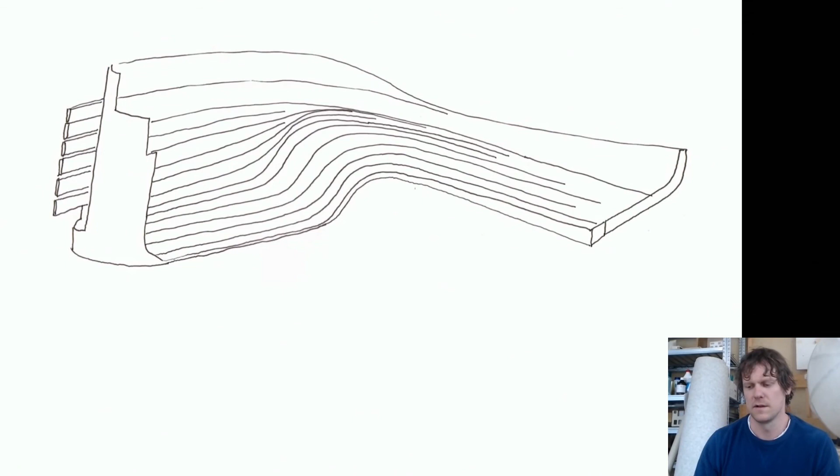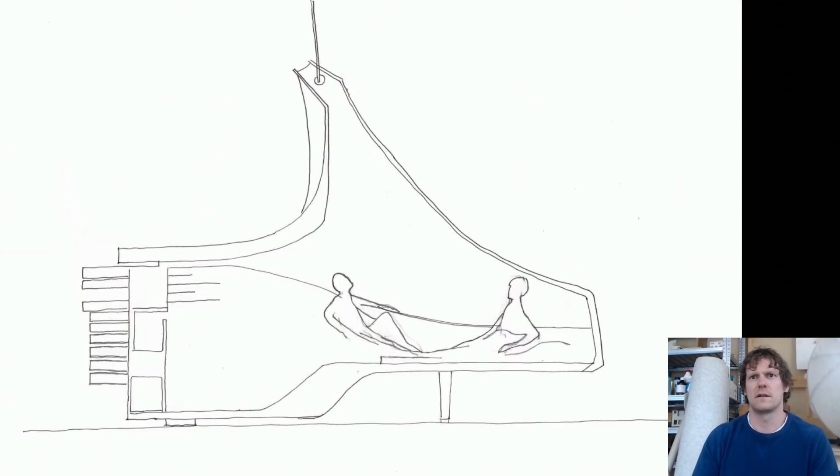On top, in this case, we use this felted Nuno wool. It's a silk, very thin silk material, and then we use wool on each side, and they are softly blended together. In this case, they create this veil on top of the bed.

And this was something, again, this visualization - this was identified very early by these destination developers, that to have this kind of honeymoon suite would have great appeal in an international travel market. So this is still visualizations, and this is the end of this pilot project. Then a local hotel came and bought the idea.

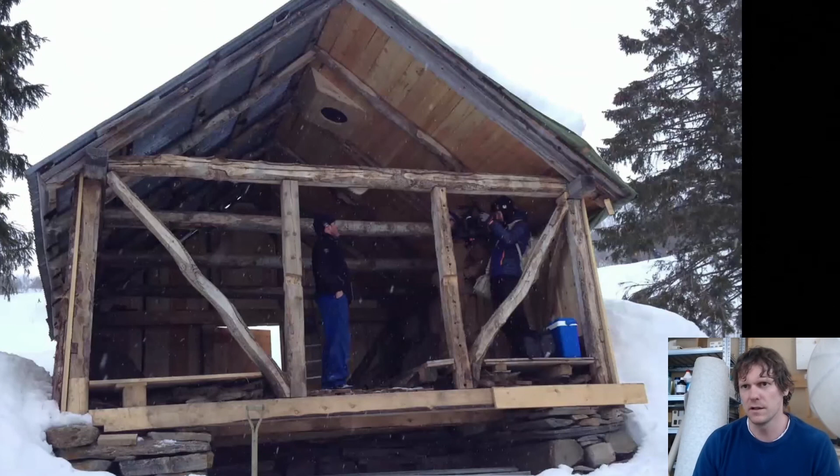You can see in this image that the project, the way it was developed, was very sculpturesque. It demanded a lot of space around it to become this centerpiece in a room. The barn that we eventually got was far from the same size - you could almost not stand upright. So obviously we needed to rethink the strategy, but we sought to combine aspects of these different typologies that we had developed in the initial phase.

Like most of these places, the entire building is very crooked - nothing is plumb or leveled. So because we wanted to expand and use as much space as possible, we needed to measure everything and translate all of these measurements to our workshop, where we started to make this shell - these are the roof rafters, and these are the beams on top of the walls. Every imperfection, everything that's slanting, we measured and put into this workshop, and then we started to make everything as modules.

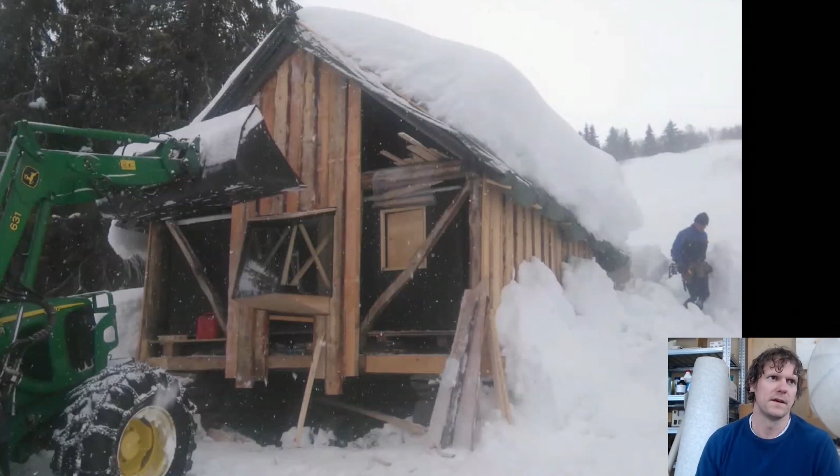We made it as a ready piece, flat packed, and brought it by tractor. This also shows the intention of the project - to give these people a reason to keep their buildings intact.

This is the actual owner on the right side - he owns this barn. He sold his land, part of his farm, to a ski resort, so he has more money than he can ever spend, and he has a lot of these barns, but no reason to keep them. But the moment the hotel wanted to rent his barn and put this module into it, he started to change the cladding and change the roof, because then there's some use of it.

As I said, the new project needed to fill this void in a much more precise way. Even the small gutter in the center, we utilized in order to gain height in this module. Usually on each side of this there was a cow, and then they would shit into this gutter in the middle - that's why it's deeper, so you could just shove it out.

We made this to fit into that, and then we had this entrance like a moon door. In the ceiling, you can see there's this light tunnel - a very reflective pipe that goes through the ceiling with a prism on top and brings light into this very small pod. Here we can see how we also incorporated part of the anthill aspect - just slightly going through, very carefully relating to the situation, to bring in this very particular view that we have.

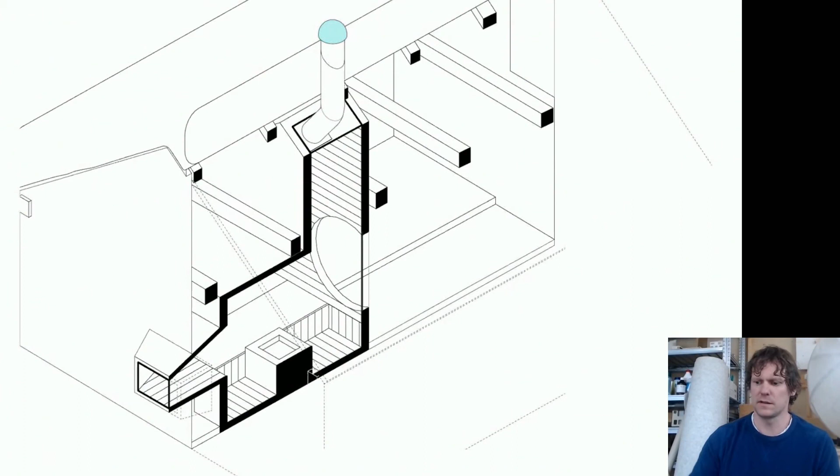And we can see how the module relates. To us it was extremely important to keep a big part of the existing space as an actual space, so that it would be this experience of going into the original. Here we can also see these slate stones - this is where the hay used to lay, so the cows would face this hay and graze.

And here we can see these slight nuances - it's much lighter and more refined, the one that we add, but it's the same material and comes from the same forest as the existing one. It's just slightly less crude or coarse in the detailing and materiality.

And here is the threshold between what we added and what was already there. So this is like, it's not sitting, or you cannot stand in this space. That's also why we wanted to make this entrance, like this moon door, something other than a regular door.

So you would have to respond, going through the opening, you would have to respond with your body, kind of come down, and then you're asked by the architecture to take a seating position and be on your knees on these tatami mats.

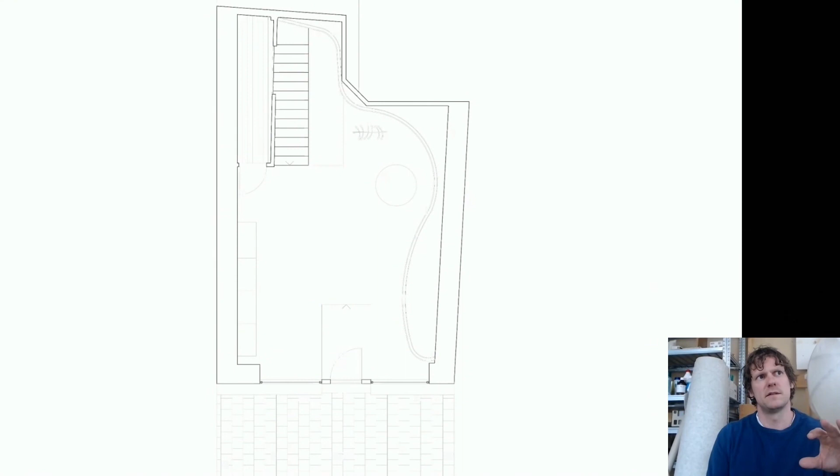So we wanted the top one to manifest this kind of social arena. I don't know if this is too light for some of your screens, but you go in and then you have this fluid wall, and it creates this mezzanine where you have the staircase taking you down to the basement, and then there is also this very slim space next to it.

You go there with your friends, try on something new, and then show yourself to whoever you are with, and get some feedback. We wanted to manifest that, and in addition, we wanted the basement to be like this flexible space, as this is also part of having a retail shop or retail space now - it has to be like a showroom.

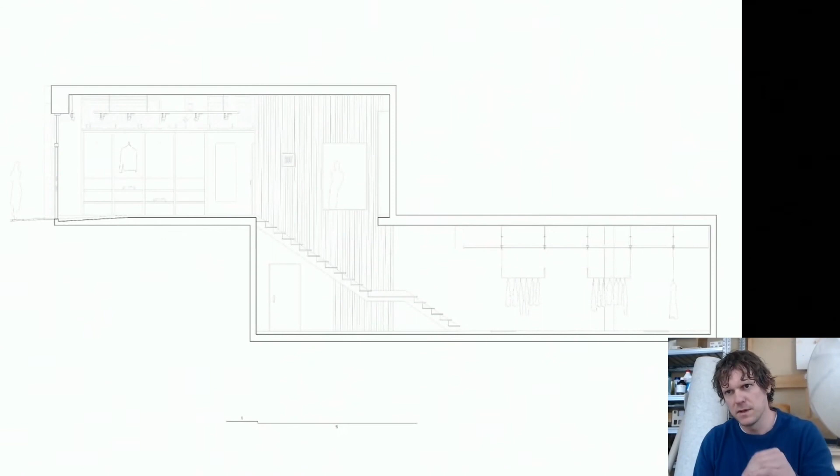It's where, in their case, they have this one shop in Oslo, and then they have one shop in the US that we also designed last year. But apart from that, most of the shopping is done online. So they have to bring everybody together, everybody that wants to experience their brand. And they wanted to be able to do these ceremonies, or fashion shows I suppose, like catwalks.

So we also designed the basement with this very flexible ceiling and very open space on the floor, where we made this pathway that's always part of the floor. And then we wanted to take away this cellar kind of feeling, this subfloor feeling. We introduced this very light ceiling - it consists of fabric, and behind that there's a lot of LED lights in strips, made so that the light cone overlaps.

So you would have this completely perfect lighting ceiling. And hanging down from those are hooks where you can hang this flexible hanging system. And also, as you may notice, the sprinklers are painted in the same color and go into the grid and the rhythm.

So it's kind of nice to work with these high budget retail spaces in order to experiment on the detailing and devote ourselves to this detail fetishism in a way, and then maybe bring it out into more real world application as well.

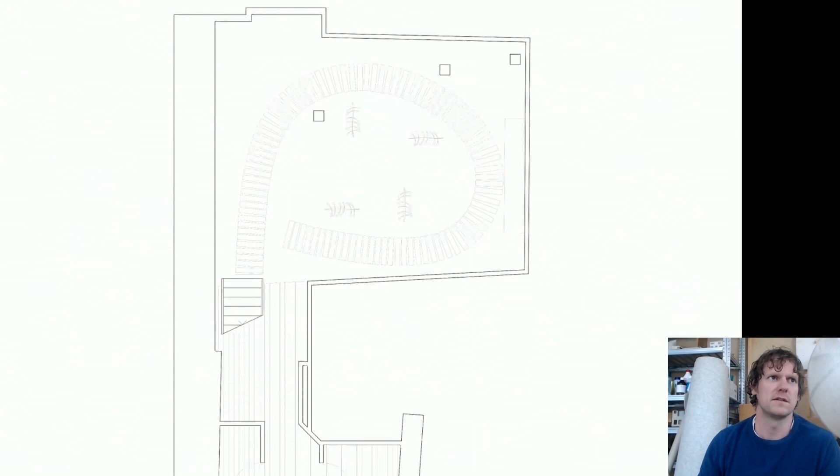You can see the plan with this catwalk that's embedded into the floor, this flexible hanging system, and there's a detail from the oak floor. It's kind of like this earth, rammed earth floor, where this is just rammed into it, flush.

A very important part of it is this kitchen cabinet that normally just sits in the back, but it can also completely transform this space into more of a lounge area, where you bring out some furniture, and then you have a more intimate atmosphere together with some clients.

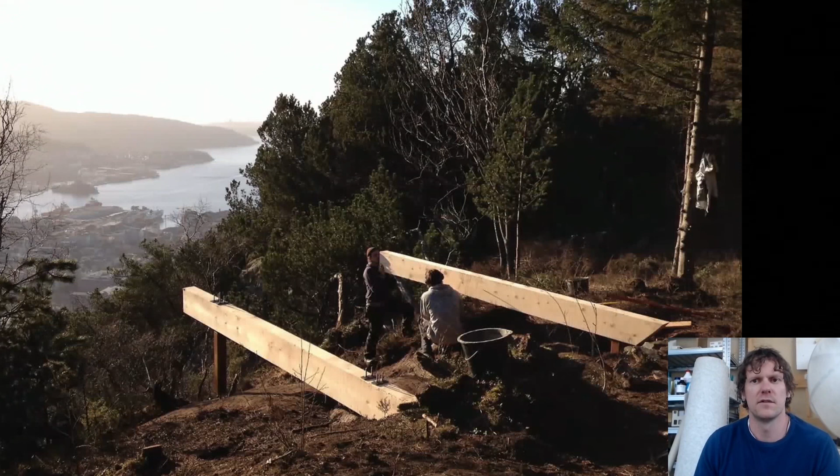So as I said, this is something that we do less of. What we do more of is these small projects in our own region. A lot of these are developed back and forth between the location.

This is something that we did, a project we did 5 years ago together with students. So we initiated the project. We asked the municipality if we could, if we raised money, if we could make a guest room for the city of Bergen.

We had some issues landing the deal, but in the end we said, okay, if people don't like it, then we will pay to remove it. So we got some funding from people that wanted to give this gift together with us.

And in the budget, we also put away some money so that the government or local municipality could just decide they don't want it anymore, and then we would have to take it away. So then we got accepted.

And then we started to go back and forth between the drawing board and the site, started to make some of the actual foundations before we finalized the design, and made a lot of experiments in the workshop.

And in the end, we landed on this because we wanted the client to be like the children, especially the children of Bergen. A lot of people don't have access to the outdoors, and it demands a lot of resources. So even if it's seemingly free, we wanted to create this space that would be accessible to everybody.

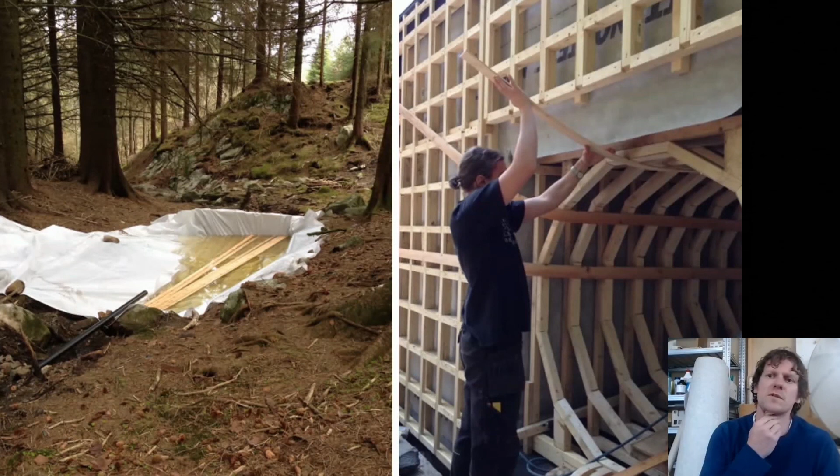This was done, we experimented on school, and then we brought it up and started to build, but the wood had different moisture, and we had different quality of wood when we came up, so everything started to crack. These are just some stories from the building and how we made it.

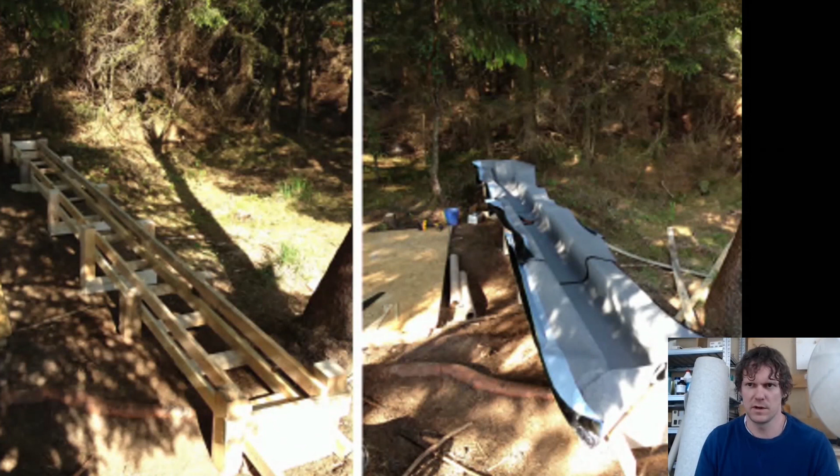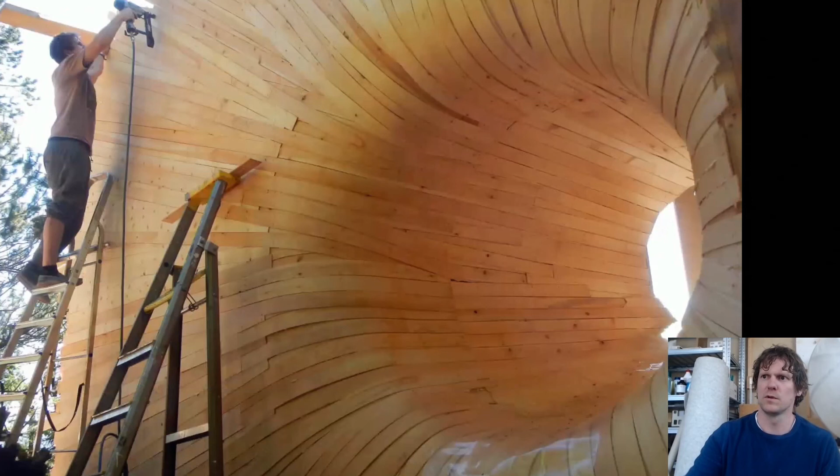So in the end, we had to make a hot tub for all of the boards, and we had this old heater that we dismantled, and then we took the heating elements and made it into something much more sturdy, where we could heat the water. So every piece of wood is first boiled, and while it was still like boiled spaghetti, we put it into these layers on top of this entrance.

And you can see the freshly mounted entrance into this cabin.

And as I said, one of the things we wanted to achieve was to have this appeal to the younger clientele. And we wanted also to be like an attraction, a place you would visit even if it's closed, because the way it functions is that you borrow the key from the municipality.

You have to go, it's completely free of charge, so it's been very popular. But we wanted still to be an attraction, even if you didn't have the key. So you can see how the children run around and play and enjoy this area. And also, in order to take nothing more than we give, we also lifted it up, and then we had this lunch place where you have shade from the rain.

This is an interior, very simple, with these curves where you have this mezzanine where you can sleep, and then you have a fireplace, and this is the city of Bergen. We have this funicular, like a train with a cable car that takes you up to about 400 meters above sea level. So this is extremely close to a highly dense urban area, and it has now been rented out for the last 5 years, and it's been fully booked ever since.

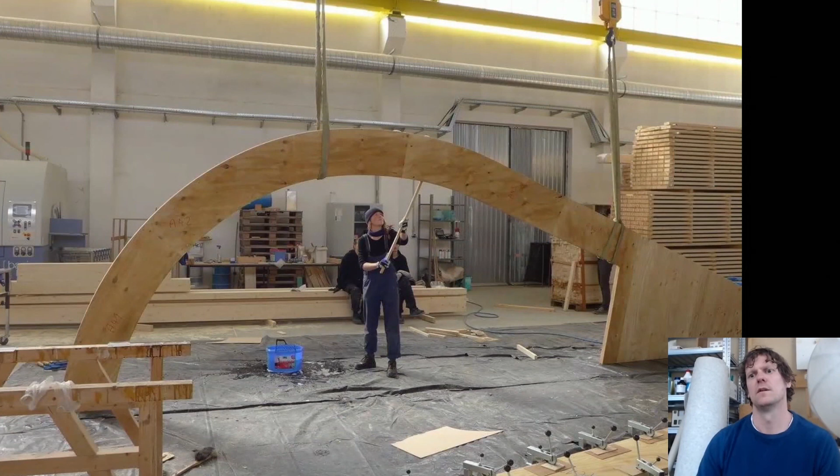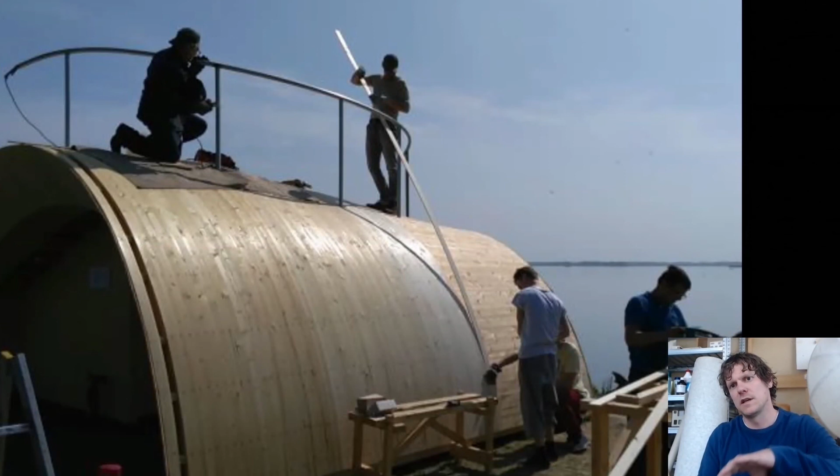And then we have these industrialized workshops where we could clamp everything and make these very precise shapes that made the building very easy. So you can also see the vision coming to life with this wooden carpet.

It's several layers of bent wood. In this case, the wood is actually just regular panels, thin panels of maybe 12 millimeters. So the bending is done without any treatment, because the curve is so big. We can have these very smooth shapes without doing anything special, and it's very natural to this format of the wood.

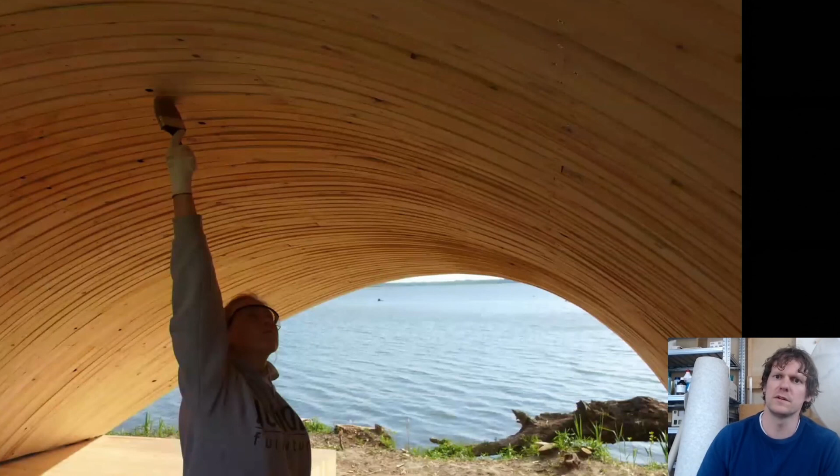The most important space in this project is this covered cave-like area, because the main client here was bird watchers. All they need is a dry surface and preferably protection from the rain, and also a silhouette in the background so the birds don't get scared. They want to be as low as possible, so they can lay here and look at the birds.

We also insisted on bringing this to some kind of furniture that would have appeal to everybody riding across on a bike, for instance. It's a very long official bike road that stretches along the Danube River. It was also popular with the main target group that made these bird watching seminars possible.

It's connected to a professional bird watching agency that takes people around and brings them up to show them this very nice area. And once again, the fashion industry wanted to use it. A local fashion blogger sent us an image afterwards, which was funny.

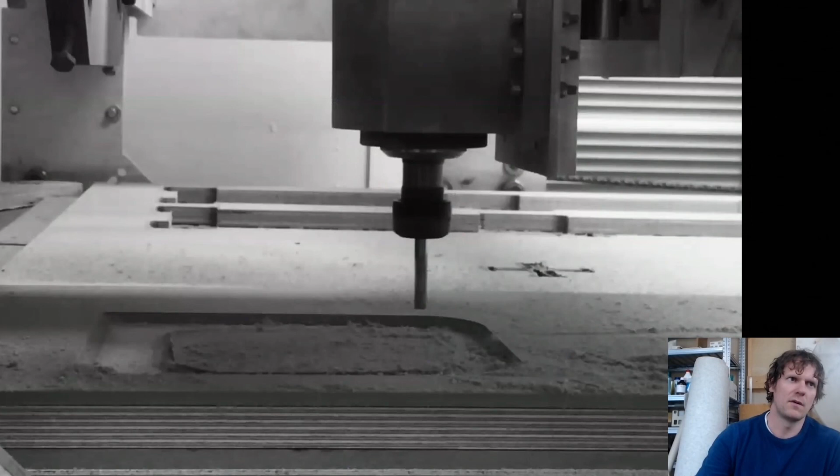In this case, we had to make our own CNC cutter, as we didn't have one already. We found that because the design is this very soft gesture, it climatizes this one space. And then inside that, we placed this sleeping box.

I think that architecture in every culture starts with this kind of gesture to climatize something. Either you protect yourself from the rain, or you want to completely control the climate as we do now, or it starts with the need for shade, or in our case, very often protecting against a certain wind. The less we do these fully climatized projects, the more we can appreciate these different transitions between the outdoors, the nature, and the fully climatized, like 22-degree spaces.

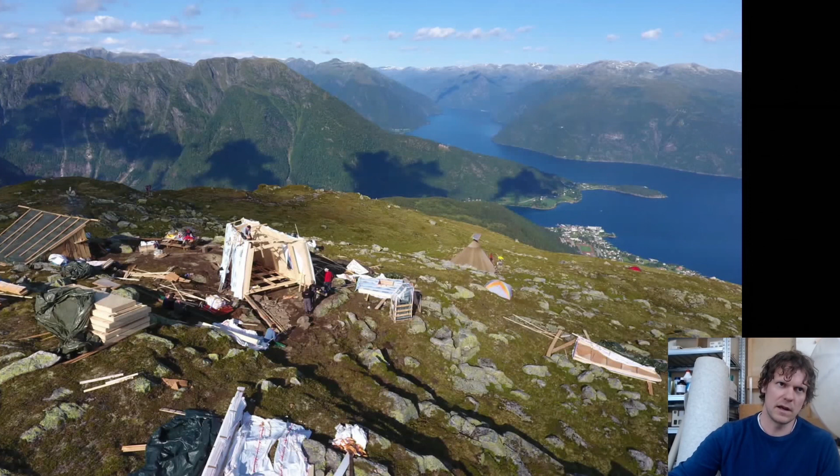This one - the closest road is also down here, so it's completely cut off infrastructurally from the rest of the world. We had to transport everything with a helicopter, so we did everything ready-made in the workshop. We made more or less the complete building, put insulation into everything, made it tight, and made it so that every piece is manageable for 2 persons.

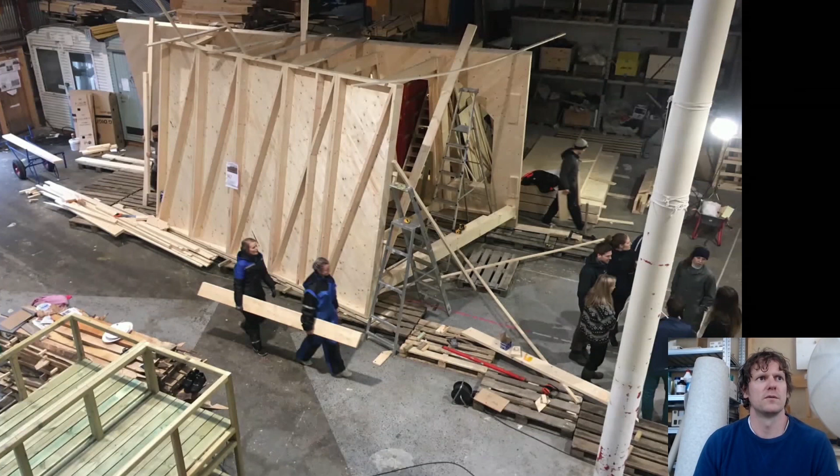You can see here that it's self-supporting - this is one piece, before the insulation is put in. The entire mounting process is planned, and things are flat packed in a reverse order, because at this altitude we wanted it to be as efficient as possible.

Once again, it's this notion of having the architecture be very immediate when it comes to the climatization aspect. The architecture is like a gesture to control the climate, a gesture to protect whoever is visiting from whatever rough climate is here.

In this case we have two very heavy winds, southwest and northeast, that appear at different times. So we always wanted a sheltered entrance area, and we made this shifted parallel plan. They're not parallel, they're kind of a V shape, shifted a little in relation to each other. So we get one sheltered entrance here with this view, and another sheltered area here with another view going out.

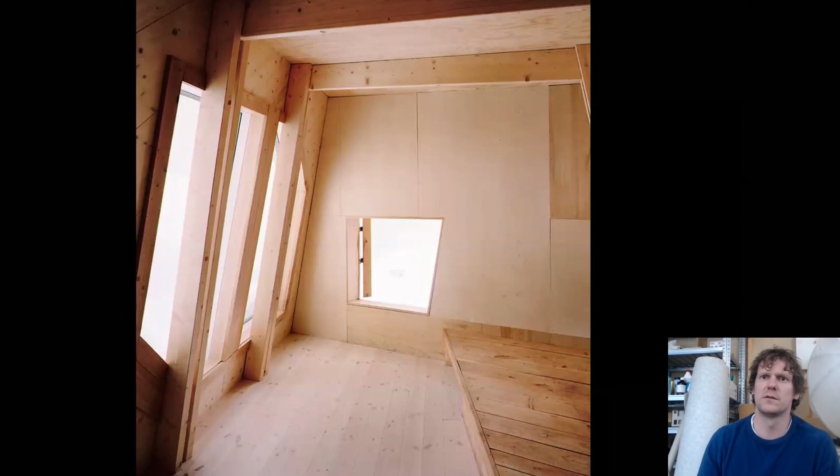We also wanted to work with this motif in the interior space, so you get this very sheltered feeling even though it's a fully climatized space. We wanted that atmosphere of being inside a ship's hull, where you feel the environment and feel, in a way, what's at stake.

And this is from the entrance, where you can see down to the fjords. It's a very hazy day. We have two different entrances: one on this side with a kind of counter, where you sit in the opening, and the other is more of a conventional door that you just go through.

Now I'll show the last one, which is more conventional—something from the historic center of Bergen. In this historic center we rarely see new things, and when we do, it's not necessarily very successful, I suppose.

This is an extremely big yacht designed by Philippe Starck for Melnichenko. This private structure goes in and completely destroys the area—this is the UNESCO harbor front in Bergen. It shows how fragile these situations are: if you bring even a boat with such contrasting aspects, it completely destroys and takes away a lot of the quality we feel.

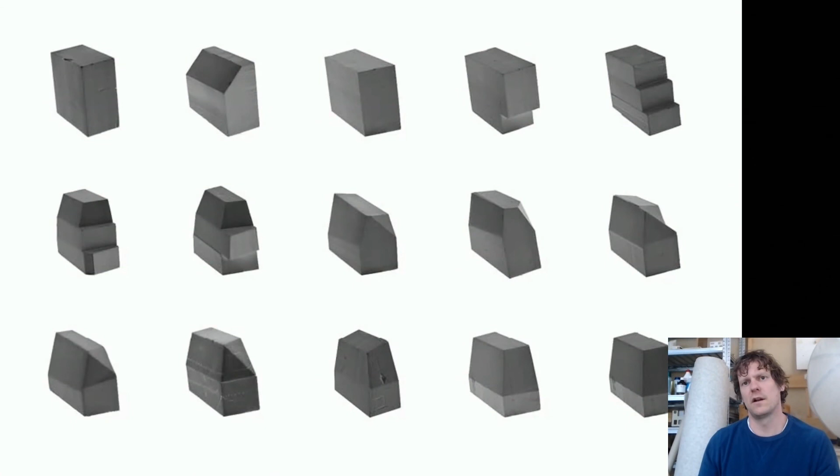Working with this situation, we needed to find an architectural language that would both deal with this notion of public space and also relate to the surrounding area. This is more of a conventional architectural model-making dialogue, where the conversation you have around these attempts is kind of the DNA of an office, and what you use to score them. In our case, we used them to find out how we could create good quality of space for the project, but also how we could have a shape that would relate in materiality and scale, particularly to the neighboring buildings.

One of the first things we did was break it down so that our surfaces would all relate to the surfaces around them, so none of them would be individually bigger than any other facade or shifted piece of building that we see around us.

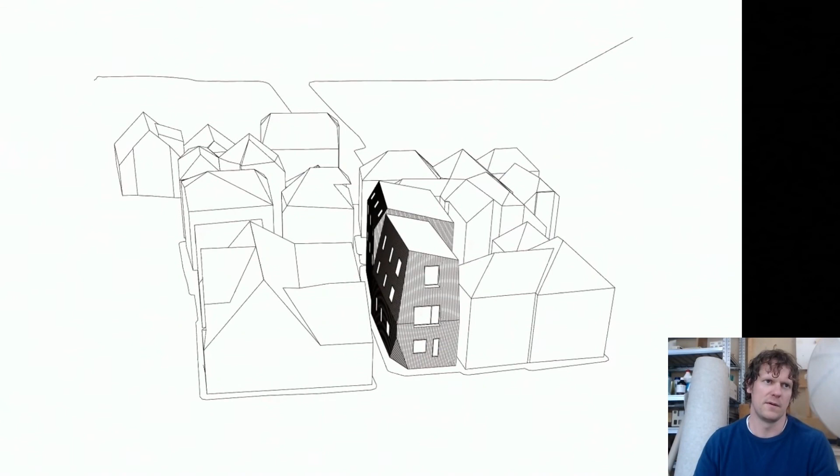We also separated the two volumes into two. They are connected through this piece in the middle, but are also very much visually two different buildings. This relates to the facade on the backside, where the existing one also has these two broken buildings. We took it a little bit out from the existing buildings to not destroy the detailing around the rafter, which is extremely important in these historic buildings.

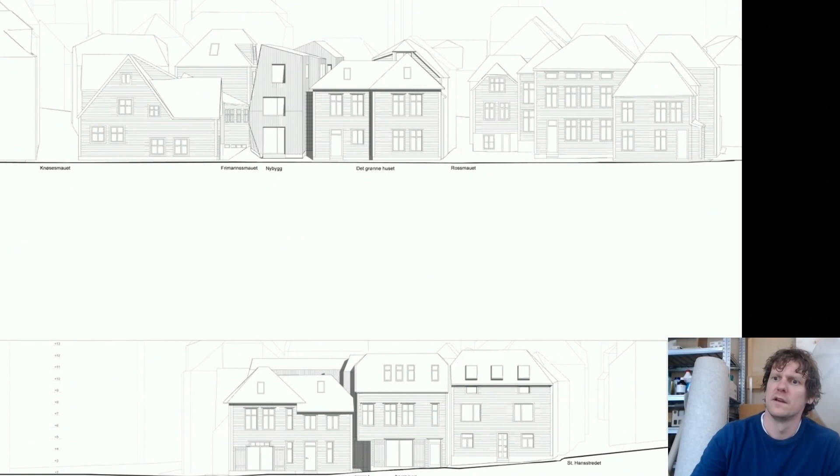Just an overview of the plan: it's a gallery space, with a craftsman who works with tin sheet metal making lanterns, office spaces on the first floor, and this very important courtyard that's also open to the outside.

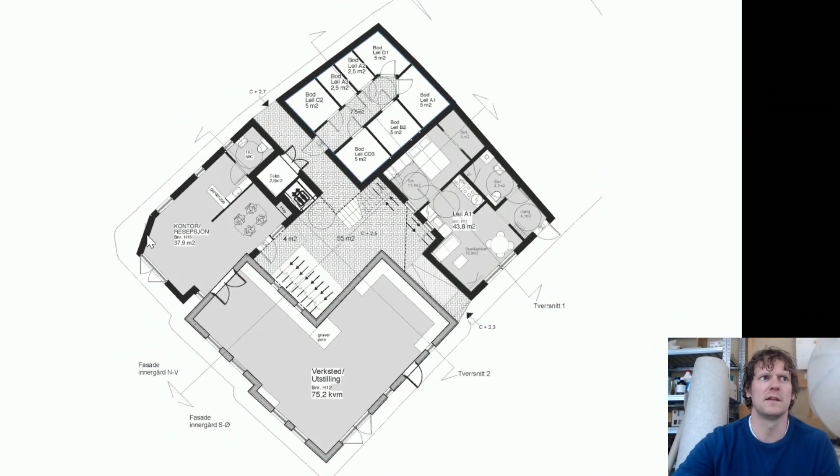So it's this architectural language of separating between this as a common area, and then the threshold, which is less inviting. As we'll see in other pictures, we have public access to this side, where the architecture steps back and invites in - a more conventional second floor and a very generous third floor.

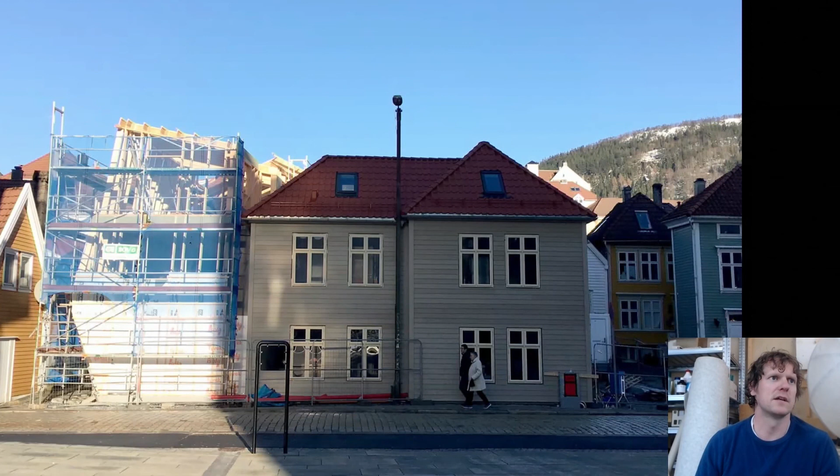We can see from the building situation this was obviously extremely challenging to build, as the site is extremely narrow, and getting the trucks and material to the building site is very difficult. It's also made completely out of wood, which is very challenging in terms of fire hazard and all the technical demands, but in terms of the quality of architecture, extremely rewarding.